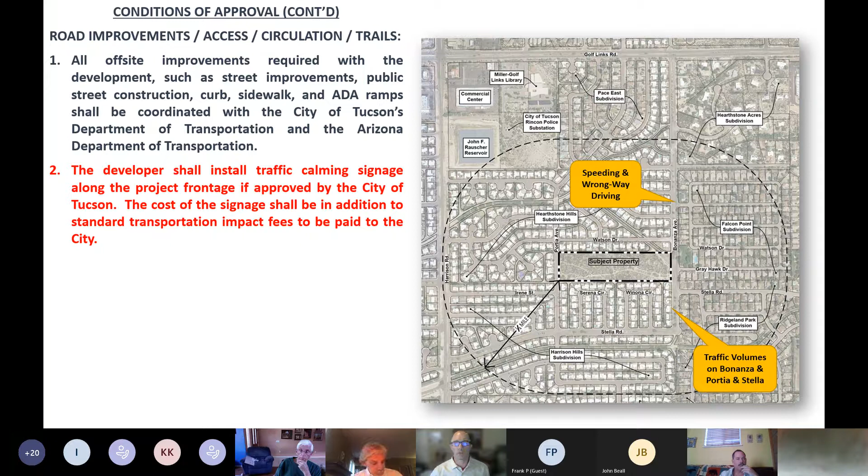Now at the neighborhood meeting, some folks said that our traffic counts that were taken a couple Thursdays ago weren't representative of typical volumes. I'm not sure why that would be, but even if you double or triple the measured traffic volumes, they're still well below 50% of the road's capacities. And this project will only add 10 or 15% to that, which is a minimal impact and certainly well within the capacity of the surrounding roadway system.

In terms of the land use conditions, the ones we've added are in red here. And I'll run through those real quick. One of the questions that's come up before is how do we know that what we're saying is actually going to be enforced and put into this? So adding them as conditions of approval, of course, has that authority and that effect.

So the developer has committed to installing a 6-foot high rear yard wall on all the homes. That'll be decorative, of course, per this first condition. That's a standard one, requiring certain combination of decorative elements. Typically, they build the wall at 4.5 to 5 feet high, but recognizing the concern about privacy, they've committed to bringing that up by a foot. So now it's at 6 feet in height.

Also, the perimeter buffer yards, committed to landscaping those with 50% more trees and shrubs than required by the code. And the result here, at least 3 trees behind every lot. They're ironwood, foothills Palo Verde, velvet mesquite, and acacia. And those are found on site, and those are shown on the landscape plan. And of course, any dead vegetation there will be replaced promptly by the HOA. Front yard, also condition number 5 here, committing to a minimum installation of landscaping in the front yards as well.

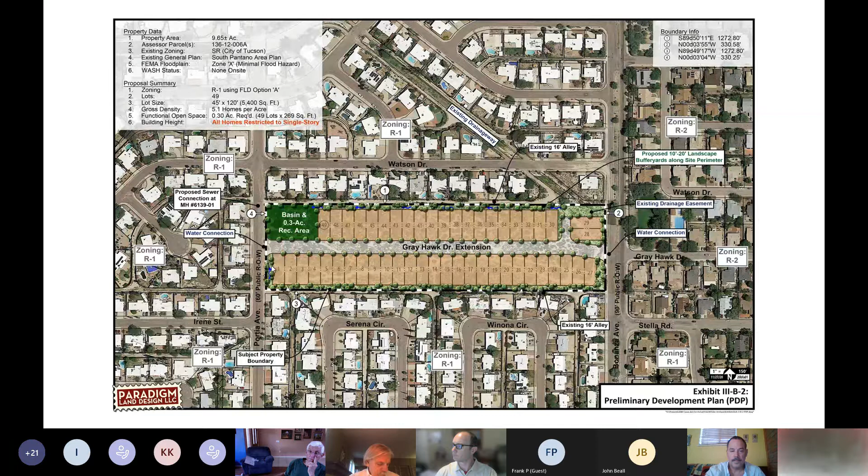Right. But my question was more, I think you've answered it. So when you're saying edge, there's only one row of lots proposed on the north and one row of lots proposed on the south. So you're saying that as to each of those lots on the north, the average will be not just along the edge of the lot, but as to the full lot, the average elevation difference will be 4.8 feet from the adjoining subdivision. Is that correct? I see what you're saying. So the average here would be from the finished grade of that house to the finished grade of this one over here. Because I know the concern was really tied more to the building height.

So it would be from the pad, the finished pad elevation under the building. So the lots, of course, will slope away from the building a little bit. So that would be a little bit less height there. But at most, where the building's located here, you'll have that 4.8 foot maximum average along that northern edge, and then the 4.2 on the south. Okay, thank you very much. That addressed my question. Thanks.

Would anyone else in the audience like to be heard on this matter? If so, please speak up or raise your hand, and I'll get to everyone who wants to talk. So, let's see. Mr. Rodriguez, Zacharias Rodriguez, I see you have your hand up, and I believe you testified at the last hearing on this matter, so I'm guessing you're here for this matter again. Is that correct? Absolutely. Okay, so please go ahead, start with your name and address, sir. All right, 9732 East Watson Drive. I butt up against the north side of this development.

So now he's saying, and I think me and a lot of the other residents here haven't received any type of notification, especially since he said that they had another meeting about this development, which I never got anything in my mail. I've never seen anything. And I don't even know if most of my neighbors even know about this. But I think most of us are a flat out no.

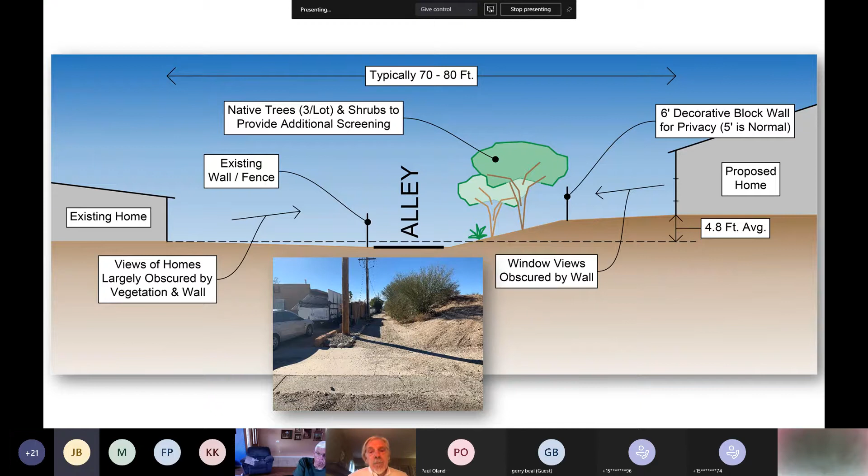Well, how about if we move your... Thank you, Mr. Rowland. Thank you. Okay, I'm going to close the hearing on that case. So the hearing's closed on C9-2103. We'll take up our second case for this evening. It's case C15-2103, Alvernon Valencia Annexation District. Mr. Beall, would you like to present the case? Mr. Oland, could you stop sharing your screen, please? Sure, Mr. Reno, I can present the case. This is Peter McLaughlin. Perfect, Peter.

This is an application by the city of Tucson to establish original city zoning on a recently annexed parcel totaling approximately 477 acres, located in an area bounded by Valencia Road on the north, Alvernon Way on the west, Los Reales Road on the south, and a line just west of Swan Road on the east. The Planning and Development Services Department recommends approval of the R1 and I1 zones, as these are the most comparable to the existing Pima County zones and do not permit densities and uses greater than those permitted by the county zones. So translation to these city zoning classifications is recommended and is deemed appropriate.

And within the annexation district, the request will also classify Valencia Road as an arterial gateway route, and Alvernon Way and Los Reales Road as arterial routes on the city's major streets and routes plan. And to date, we've received 2 approvals and 2 protests on the proposed original city zoning translation. That concludes the staff report. Thank you, Mr. McLaughlin. Would the applicant like to be heard? Thank you, Mr. Reno. Mike Chakowski with the city manager's office. I have no comments. The translation zoning is appropriate. Thank you, sir.

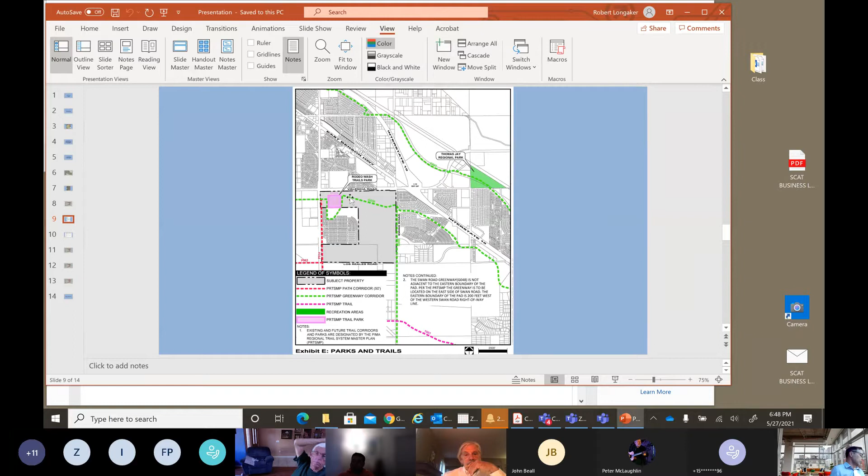So the other advantage of this is that this allows the State Land Department to be highly flexible and meet market demand as it comes. Of course, you never know exactly what the market is going to demand. So by offering and allowing different land uses within the development units, it allows the State Land Department to meet that market demand.

I also want to mention briefly, and this is the last part of my presentation, neighborhood outreach. We notified over 300 property owners and neighborhood associations as required by the City of Tucson neighborhood outreach requirements. We had a neighborhood meeting on March 30th. We had a handful of neighbors attend our meeting. There were some issues discussed, nothing of great significance. We were also contacted by a member of the Desert Vista Terrace HOA that is north of Valencia Road. Again, they did not express any major concerns with the proposal.

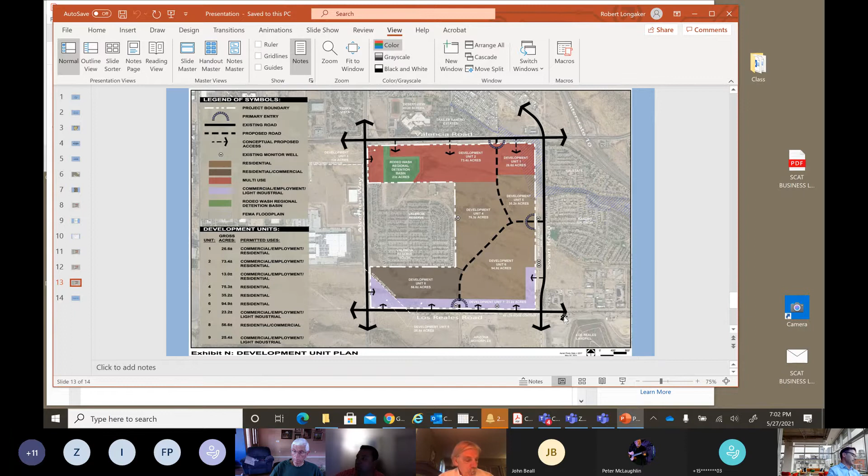Yes, this is Peter McLaughlin to present the staff report. This is a request by Keri Silvyn of Lazarus and Silvyn on behalf of the property owner Asarco Incorporated, to rezone a 1.12 acre property on the southeast corner of Helen Street and 7th Avenue from O3 office zone to C2 commercial zone for the adaptive reuse of an existing 3-story office building for a multi-family residential development with 38 units and the construction of a new 3-story building with 11 residential units for a total of 49 units.

The site is located approximately 600 feet northeast of the intersection of Speedway Boulevard and Stone Avenue, adjacent to the Feldman's National Historic District. With a total of 49 units on 1.12 acres, that results in a proposed density of 44 residential units per acre. The current O3 zoning on the property allows a maximum density of 22 residences per acre, and O3 zoning limits building heights to 30 feet. But the request for C2 zoning would allow the preservation of the existing 34-foot high building and also allow the proposed density of 44 units per acre.

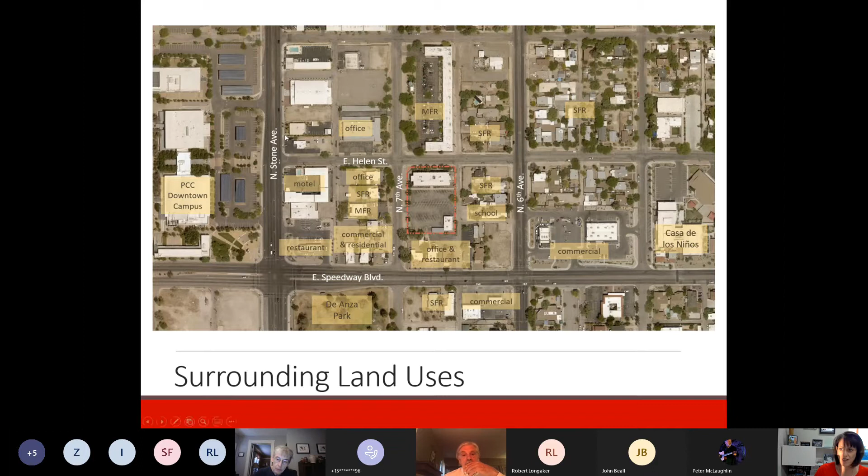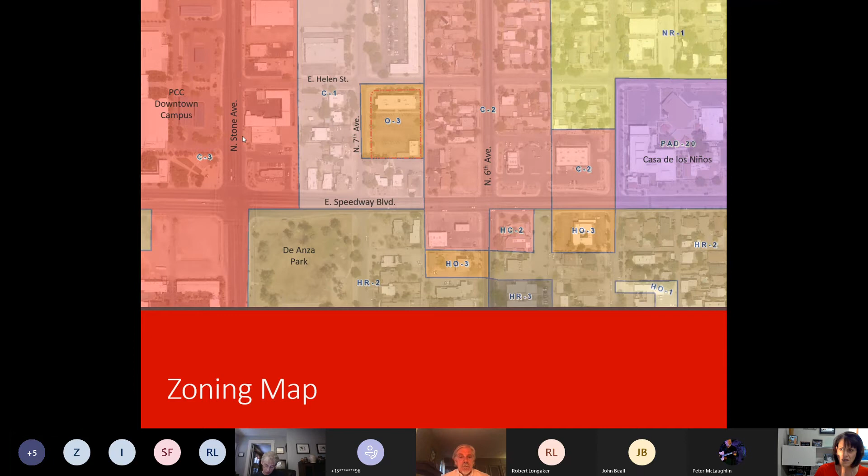I'm going to run through really quickly the existing site, the zoning background, our proposal, and the work that we did with the neighbors, and I really appreciate the Feldman's Neighborhood Association board and leadership, particularly Diana Lett, for working through some of their concerns with us. As most people probably know, this is at the corner of 7th and Helen. The surrounding uses are mostly office, school, restaurant, multifamily with some single family residential and rentals. The current zoning is O3, and it's been used for office by Asarco since we think it was built. Surrounding zoning is C2 to the east, C1 to the north, south, and west, and you can see the C3 a little further west. We are within the Feldman's Neighborhood Association. West University is to our south on the south side of Speedway, and Miracle Mile is over on the west near Stone.

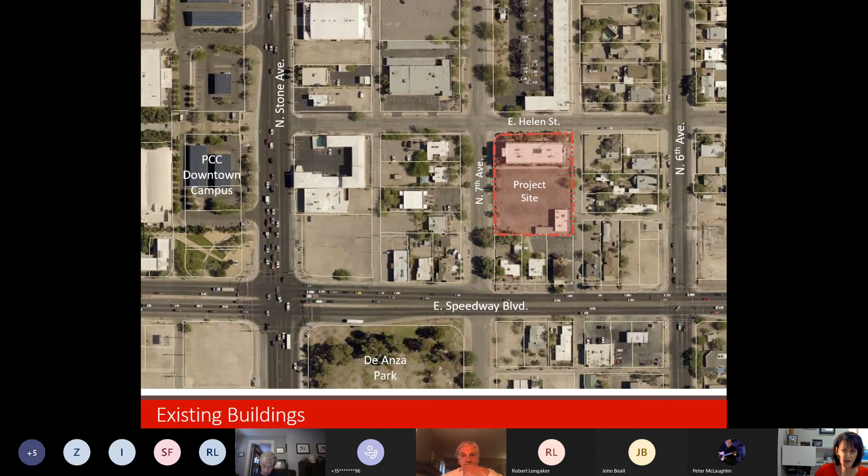There's 2 buildings currently on the site. You can see the larger building, we'll talk about it in a minute, and there's a smaller building in the corner. The smaller building is not historic. It's a 1-story. It's excess office space and a server room. The larger building was constructed, as Mr. McLaughlin said, somewhere between 1964 and 71. It's not currently listed as historic, but the Fentons are working with a local consultant and have already met with the State Historic Preservation Office and have the applications en route to have it designated as historic.

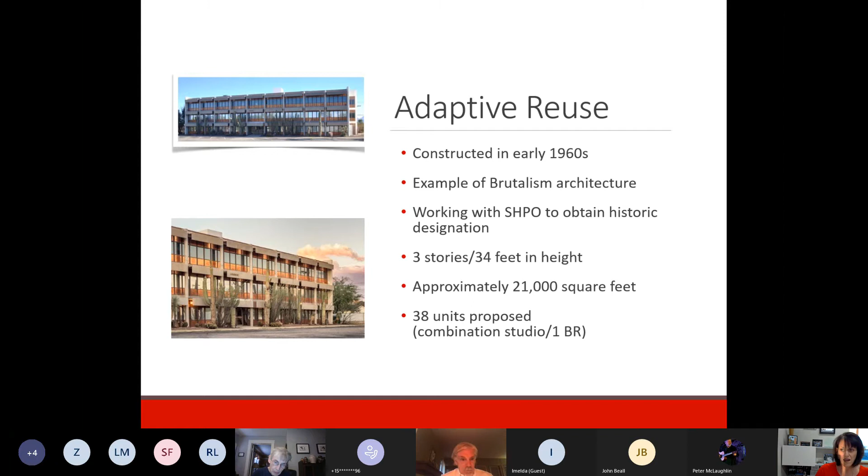The copper siding on the outside is one of the character defining features of that historic, which becomes important in one of the conditions that we worked on with the Feldman's neighborhood. The current building is going to be preserved. It's 34 feet in height. It's currently used as an office. Our plan with the site is an adaptive reuse to convert from office to multifamily.

Within the existing building, we are proposing and can get 38 units, which is a combination of mainly studios and 1-bedrooms. It's because of the unit density that we need to rezone, and then we need to rezone to C2, which I'll talk about in a minute, because of the height. So the C2 is both for the density that can support the adaptive reuse of the existing building, and it does allow us to propose, which we've done, a second, much smaller building for another 11 units.

We also need the C2 for the height. The O3 does not permit the density that we need. C1 would be the next zoning up, but C1 caps our height at 30 feet, so it doesn't capture the existing building. And we definitely want to adaptively reuse that. So the request is for the C2 zoning. The use, as I said before, is going to be multifamily. We've shown on the preliminary development plan that the second new building will have the same height requirement at 34 feet.

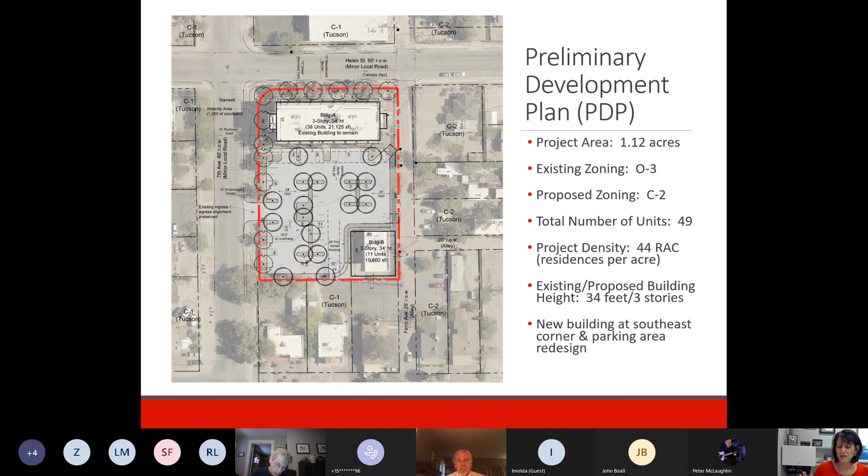Also, along with this request, and it came in simultaneously, we usually do this during the development package process, is an individual parking plan. The code actually requires for our residential use 74 parking spaces. We are proposing 1 unit to 1 parking space, which is really more appropriate in an urban setting, which is the 49 spaces. So we were asked by staff to go ahead and initially submit the IPP, the individual parking plan. We've attached that to our rezoning request as well.

It's a separate request, and I know that the Feldman's Neighborhood Association and the neighborhood is aware we're going to be requesting this. We will be working on some additional bicycle storage as well, and because of the folks that we intend to attract, which are employees in the surrounding businesses and downtown, we're hoping, as is Feldman's Neighborhood Association, that we've got a lot of pedestrians and cyclists, and we certainly don't want to overpark.

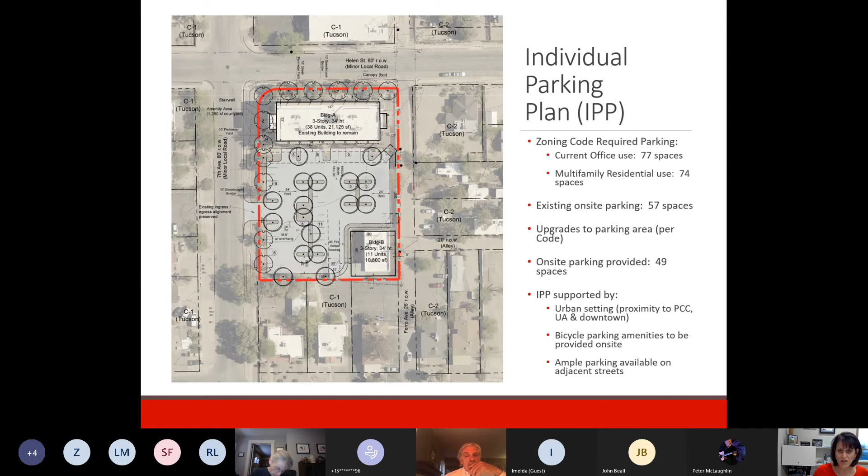Just to touch on our work with the Feldman's Neighborhood Association. One of the concerns was the historic preservation. So we worked with the ward office, city staff, Jody Brown, as well as John Beall, and Feldman's on condition number 6 to acknowledge that we are in the process. We will be finishing that off, and the building will have to be retained, which it will need to for the tax credits anyways, in the historic status pursuant to the Secretary of Interior standards.

Conditions number 13 and 14 are related to traffic. We agreed to post a sign at our exit restricting the turning movements as a no right-hand turn or left turn only. And again, the speed hump on Helen as well to help slow down the traffic in the neighborhood. Security was a big issue for the neighborhood association. So we added condition number 7. The neighborhood wants to make sure it retains its fence all the way around.

So we have limited access at the driveway as well as pedestrian limited access. And we specifically mentioned the copper exterior because that was a concern. So we have a condition requiring that we maintain the copper. It is one of the elements of the importance of the historic designation, so we'll be required to maintain the copper in that regime as well.